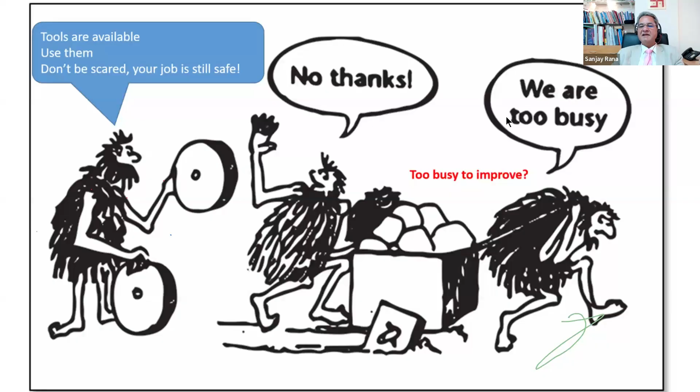All right, so what we are going to talk about is a new era in dam health assessment. We always say it's a disruptive technology which we are going to talk about, because we are getting into a journey into the disruptive realm of geophysics.

This is a technology which is poised to revolutionize our approach to dam health assessment. When we talk about disruptive, we are basically talking about technologies that not only innovate but redefine entire industries, like when computers came, when mobile phones came, and today when AI is coming up. All these are great examples of disruptive technologies which completely redefine entire industries and how work is done.

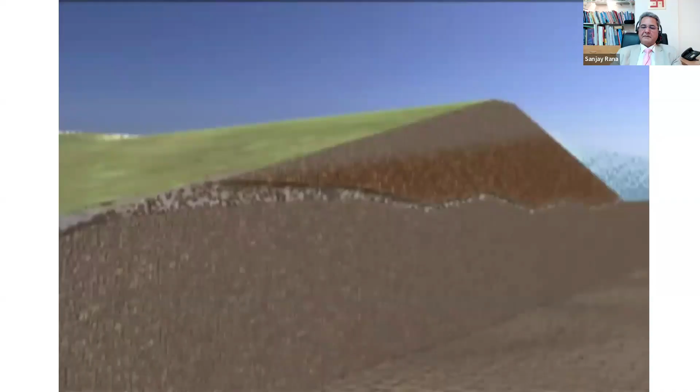While the dam experiencing seepage may appear in sound condition, there may be damage occurring to the internal structure of the dam. If seepage flow rates appear to be increasing and the flow is not clear and is carrying material, internal erosion or piping is likely occurring. Piping is an erosion process that occurs inside the dam whenever the seepage flow starts eroding embankment materials out of and away from the dam. This starts at the downstream slope or toe and moves rapidly upstream to the impoundment. This process will tend to accelerate as the expanding larger opening or pipe allows for increased seepage flows.

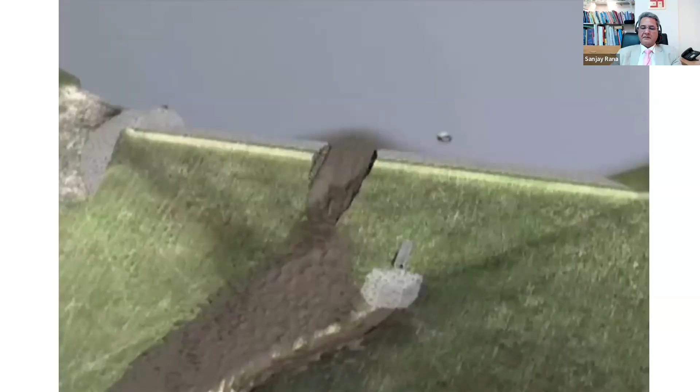If left unattended, the seepage flow and progressive internal erosion will soon get out of control. When the internal pipe or void becomes large enough, the embankment structure above it will collapse. This will result in failure of the dam's embankment and a potentially catastrophic release of the stored water, which may cause serious property damage and loss of life.

If left unattended, if not detected, if we are ignoring it, if we are not able to see it or detect it - these are the key concepts. And then, of course, at times simple things are overlooked.

As I just gave the example, simple things like vegetation on the dam. Vegetation is absolutely bad for the health of the dam because animal burrows can happen because of that. Small seepage paths can be created because of that. When trees are uprooted, it can leave cavities. So dams have to be maintained.

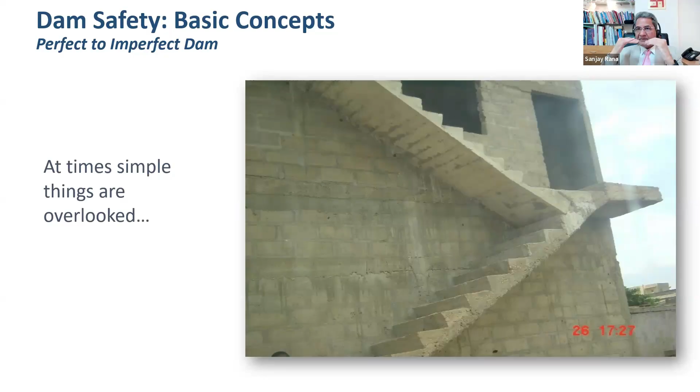So simple things are overlooked many times, and the problem grows with time. As I said, it doesn't happen overnight. And today, it's almost impossible to make new dams because of environmental concerns, space constraints, and so many reasons. We have to take care of the dams which we already have. Most of the dams are getting old. In India we have a large share of dams which are more than 50 years old, even 100 years old, and that is where we have to be even more careful about maintaining them.

We'll just look very briefly at dam inspection and assessment current practices, how we are doing it currently. First is visual inspection - regular on-site inspection by engineers to visually assess the condition of the dam. So someone will go maybe pre-monsoon, post-monsoon, look at the dam, and based on that, try to look at signals like cracks, spalling concrete, seepage, vegetation growth on the dam face, and make some conclusions out of it.

It's very much like touching the wrist of a patient just to feel what the temperature is like. Feel, not even measure - feel. Oh, you look hot today. Oh, it's cold, not a problem. And based on this temperature, trying to understand what's happening inside the patient's body. So that is visual inspection.

Then there's dive inspection, underwater inspection carried out by professional divers, particularly for the submerged part of the dam. So sometimes you can send a diver or even an ROV in the upstream area, and they can look if some water is being sucked from a particular point. So these are dive inspections.

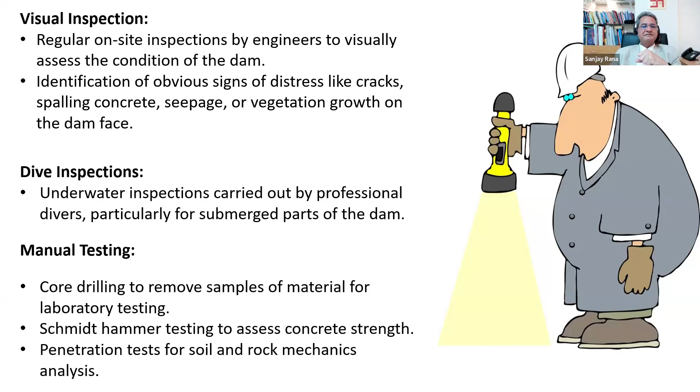Manual testing - core drilling, Schmidt hammer, penetration tests, etc. Engineering analysis - review of original design and construction documents, and based on that we do structural analysis about material properties, taking all assumptions about material properties because there is no direct measurement of them. We can have instrumentation like piezometers, inclinometers, strain gauges to monitor the structure over time, and use this data to assess water levels, leakage rates, and deformation measurements. Unfortunately, instrumentation in most old dams gets defunct, so most dams do not have active instrumentation.

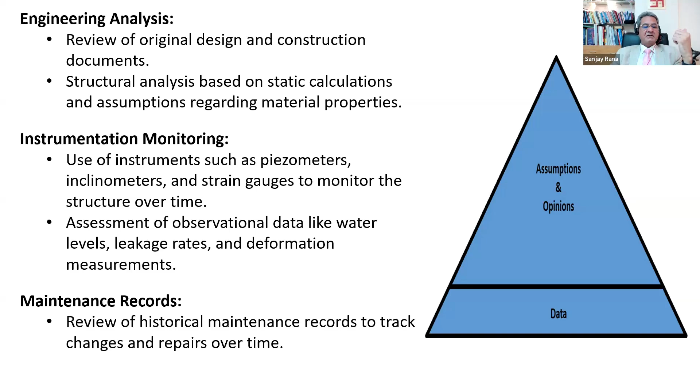Then we sometimes look at maintenance records to review historical maintenance and track changes and repairs over time. There's also load testing, empirical methods, limited NDT like ultrasonic, GPR, radiography, risk assessment, etc. So this is what we are doing presently.

So all these approaches, if you look at it, are surface only. We are not actually going and looking inside - we are looking only on the surface. They are extremely inspector dependent - that is, the qualification, the expertise, and the motivation level of the person doing it. There are many cases where people have not even visited the dam for years altogether. They were not motivated enough to visit the dam, or they did not have enough expertise to understand the meaning of a small subsidence in a particular area. It's extremely inspector dependent, and for such procedures it's almost impossible to have standards.

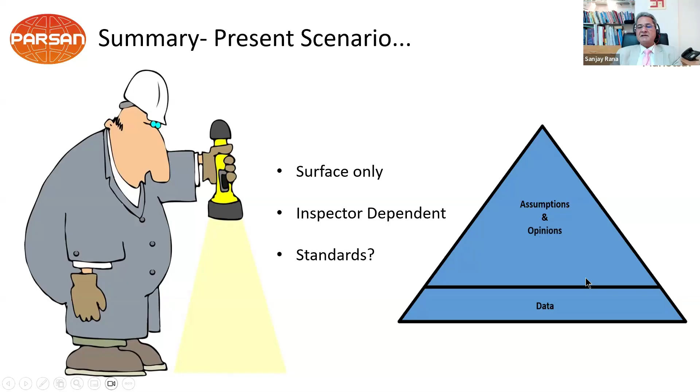So there's very little data, and lots of assumptions and opinions. This is how we are dealing with it today. And then there can be a lot of difference between perception and reality - what we see can be very different from what is happening inside the dam body.

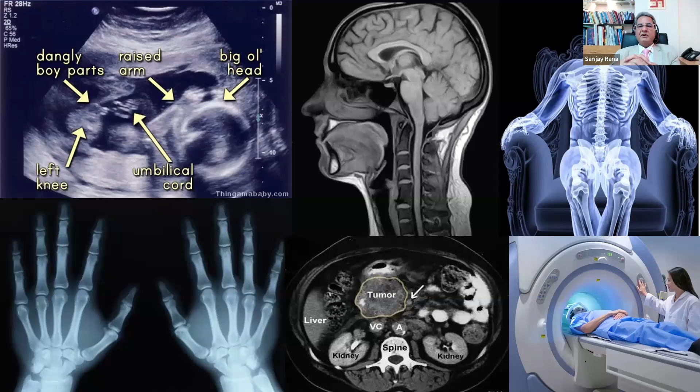So it's very easy, the best way to understand what we are doing in geophysics is to compare it with medical science. In medical imaging, we are sending different kinds of rays and waves inside the body, and looking at that, we are trying to create an image of what's inside the human body. Similarly, in geophysics, we are sending different kinds of rays and waves, or measuring naturally occurring fields like gravitational field, magnetic field, etc., to create an image of what's inside the ground.

So it is used right from oil and gas exploration to mineral exploration, groundwater, engineering applications, environmental applications, forensic applications, archaeological applications, etc. So there are a number of areas of application of geophysics.

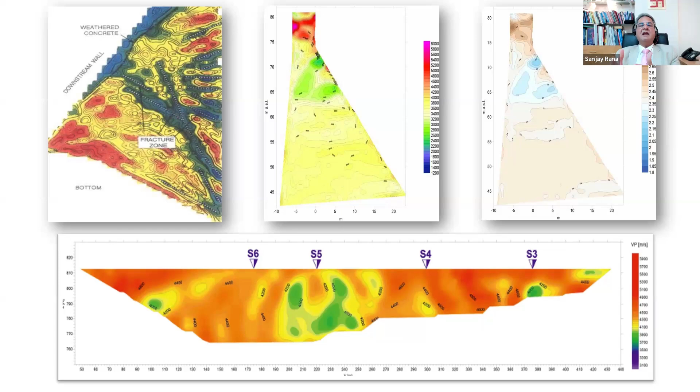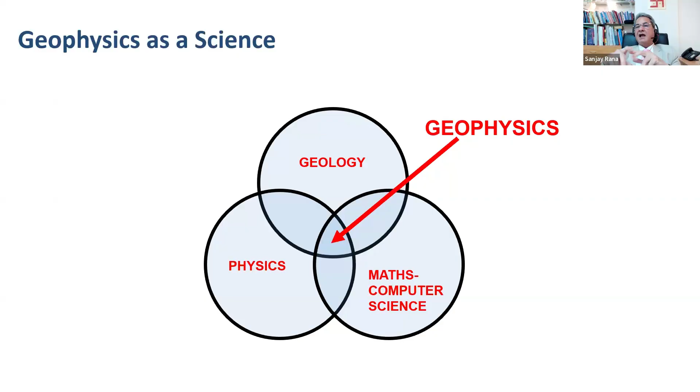So in geophysics, we are doing almost the same thing which is happening with the human body in medical science. That is, we are sending different kinds of rays and waves inside the earth or inside the structure to create an internal image of the earth or the structure. Simple to understand. As a science, it is at the intersection of geology, physics, maths, and computer science. So all three are being used when we talk of geophysics. A good geophysicist has to have a good understanding of geology, physics, maths, and computer science.

For any project, it's not dam specific. For any project, why use geophysics? And the answer is simple: you have to use geophysics because of the low cost. Again, the difference between your X-ray, ultrasound, and surgery. So in geophysics, the cost is very low compared to traditional methods.

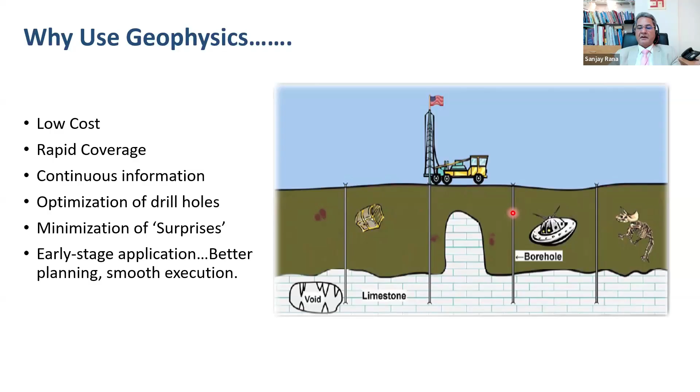And if you want to understand geophysics better, here is the third Indian Near Surface Geophysics Conference coming up, 12th to 14th November. It's happening in Delhi. My colleague Anushka will put the website link on your chat box. You can visit the website. We are going to talk about all the applications of near surface geophysics from every field.

All right, so for dam health checks, why it is so important is that these methods can probe below the surface. Till now, as we said, most of the methods we look at are surface only. Here we can go below the surface to detect defects, voids, anomalies deep within the dam and its foundation.

So this is in contrast with visual inspection, which only gives you surface condition. Here you can detect issues which can be critical to the structural integrity unless they are detected early. For example, a small seepage zone which is developing, if you detect it early and attend to it, it will not grow bigger and become a problem later.

It provides continuous data, which is very important because it gives you a comprehensive view of the dam health. It's non-invasive, because a dam is the last structure you would like to drill through. So potential weaknesses, seepage pathways, and other risks can be identified and addressed before they become critical.

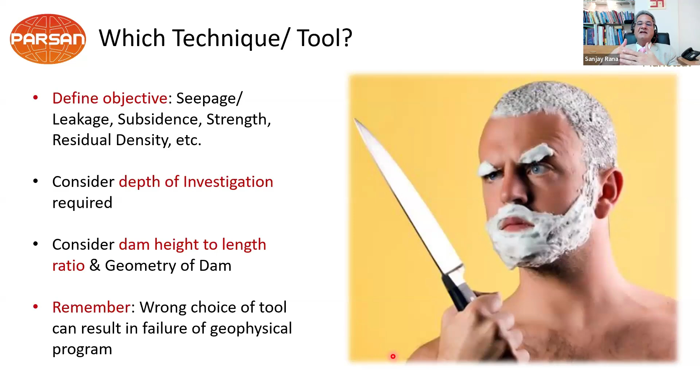Each dam is different, and since all the parameters of a dam are different, you have to look at these parameters before you decide the methods which are applicable. So it's a very important thing to remember.

Concrete dams can have cracks, degradation, water leaks. Masonry dams can get degradation, density loss, water leaks. Earth dams can have leak path detection issues, internal erosion, strength, subsidence, cavities. Then you can have issues with your stilling basin—condition, erosion, damage. You can have issues with canal leakage, foundation defects.

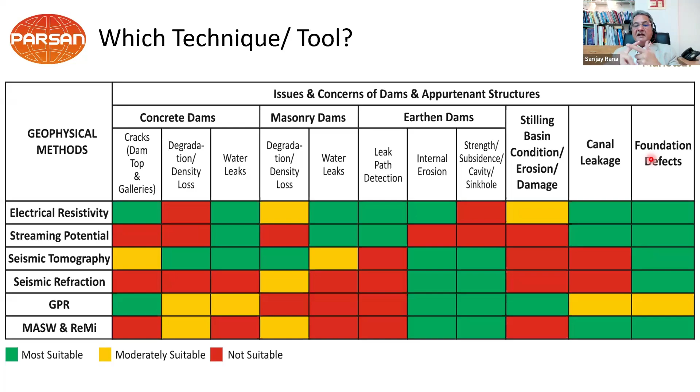So we have made this table which shows that there is one or more methods which are most suitable or moderately suitable for practically any problem you can list in your dams or appurtenant structures. The idea of showing this table is that for any problem or objective you have, there is one or more methods available.

How you apply geophysics is very important. That is something which pains me to see today, that more often than not, we are making a big mistake.

There is a 7-step framework of geophysics, which starts right from setup, where we understand the objectives, then properties, where we look at the material and what property contrast we are expecting. For example, with water seepage or water saturation, which physical property is going to change? Mostly the resistivity or conductivity. So which property is going to change? Based on that, we find out a suitable geophysical survey and design an effective and efficient field survey. It's very important to follow this process.

Unfortunately, today most practitioners are completely ignoring these 3 steps, and they run directly to data, that is carry out the field survey. So they take equipment, just go to field and collect data. That's not the right way of doing it.

Anyway, so data, then processing, then interpretation, and then synthesis, combining all interpretation with prior knowledge of the problem and other relevant information. More often than not, this is what is happening in the name of geophysical services, and steps 1, 2, 3, and 7 are being ignored, and that is a big problem. So we have to be very mindful of how we are applying geophysics.

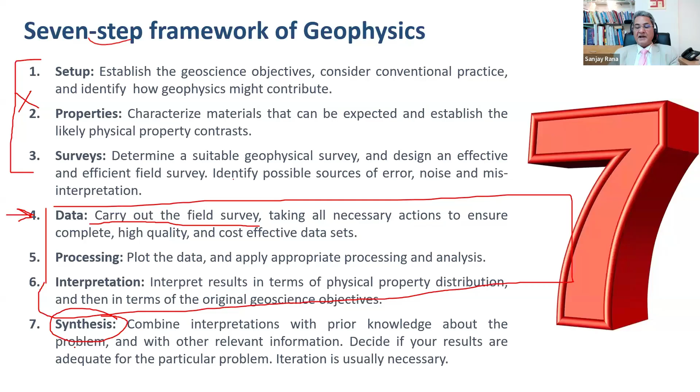Now coming to the methods we are going to talk about. As I promised, we are not going in great theoretical detail of all the methods. That's not the idea of this webinar. The idea is just to make you aware of what all is available and how it can help you.

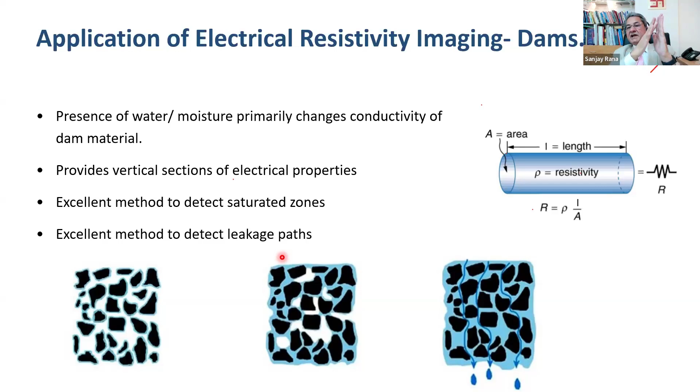Electrical resistivity imaging is a very strong method which is basically working to find out the change of conductivity or reciprocal resistivity. Presence of water or moisture will change conductivity or resistivity of the dam material. So in a dam, when you go vertically down, there will be changes in moisture level because of the change in reservoir level. That's normal. But once you go laterally from one end to the other, there should not be any change unless there is an anomaly. That is the basic principle on which the resistivity method works.

The working principle is very simple. You have 2 electrodes to inject current, 2 electrodes to measure potential. Ohm's law comes into picture: R is equal to V upon I, and based on that you calculate the resistance multiplied by a geometric factor to get resistivity.

What has changed over the years from the basic 4-electrode resistivity method is now you have multi-electrode resistivity methods in which you can put as many as 120 electrodes at the same time. The basic principle doesn't change, you still have 2 current electrodes and 2 potential electrodes, but the way you conduct your fieldwork has changed a lot. It's much faster and you're able to get a good 2D or 3D image of your subsurface.

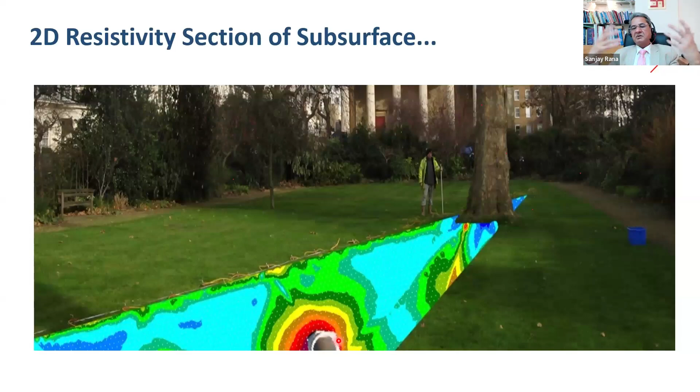So something like this: you have all these electrodes put in the ground, you take the data, and wherever the resistivity is low, like tree roots, that's low resistivity, a rock is high resistivity. That's why you get a 2D resistivity distribution.

So on a dam, how do we do it? Let's say it's a dam, so we take a few lines on the dam top, and then we can take a few lines on the berm. There is a particular dam where we took as much as 5 parallel profiles, 3 berms and two on the top. You can do as many parallel profiles as you can.

The reason is, if there is a seepage zone going like this, it will be detected on this part, this part, this part, this part, and going down, if there is one more line here, it will be detected here too. Like this, you'll be able to see a beautiful continuity of your seepage zone right from upstream to downstream. That's why you do as many parallel lines as you can.

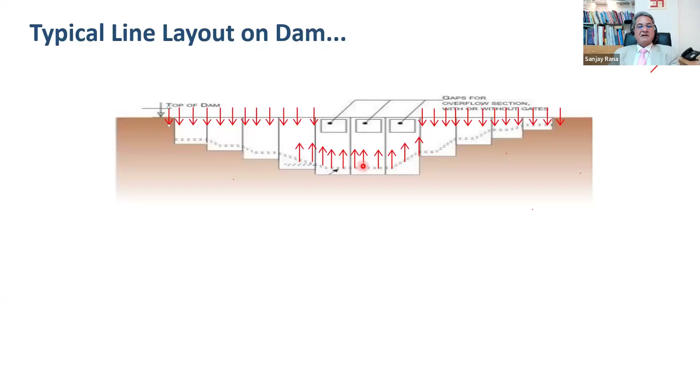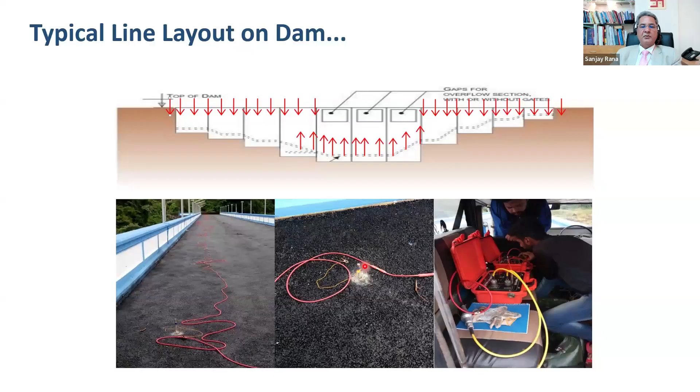So this is the top of the dam, and we put lines on top. If you're in the gallery portion where you can't do anything on top because of the overflow section with gates, you can put it even in the gallery on the roof, because thankfully current doesn't understand gravity, it is not affected by gravity. These are typically a few field pictures. The surface can be asphalt, it can be anything, that's not a problem. We just make small 6-inch holes to put the electrodes there, and then we set up the equipment.

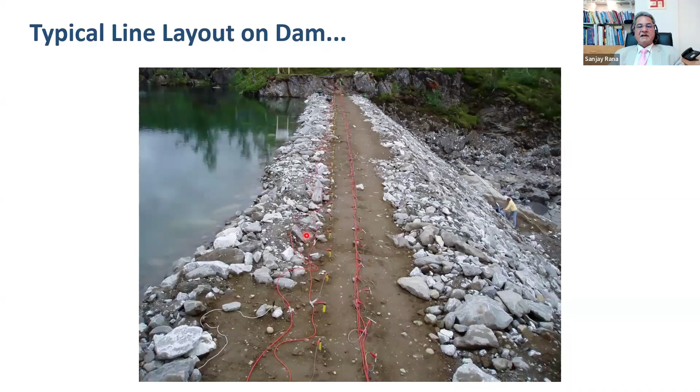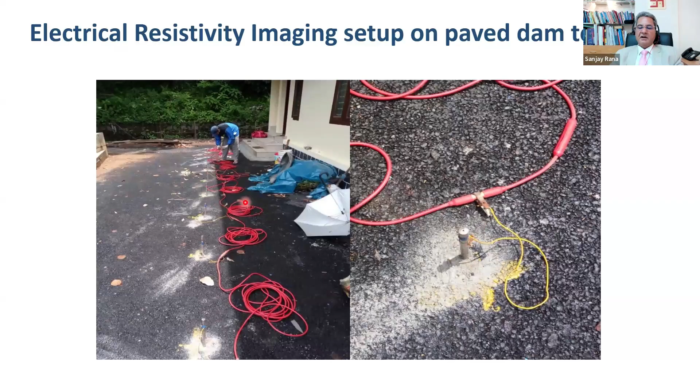Here is the equipment setup. So here are the electrodes, here is a person taking the reading, and here is the same thing, electrodes connected by multi-core cable in a dam with asphalt top. Once you continue, you complete your data acquisition, which doesn't take much time.

These days, a typical array, once you have done the layout, is taking 20 to 25 minutes. A layout can take 1 to 2 hours, depending on what the top surface is, etc. But once you do it and take the data and process it, this is the kind of section you get.

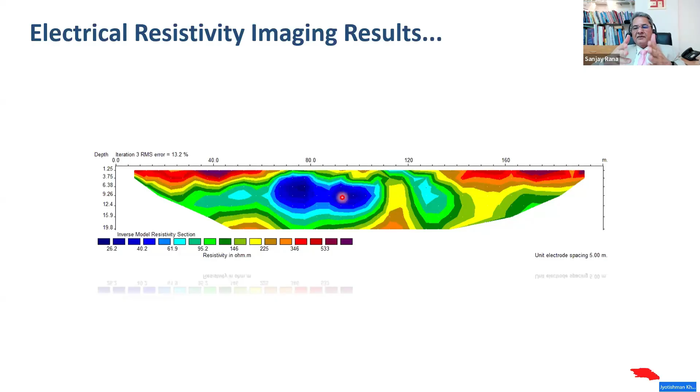Now a parallel line done after some distance, and these two zones are practically merging together. So you're having the complete mapping of the zone from one end to the other.

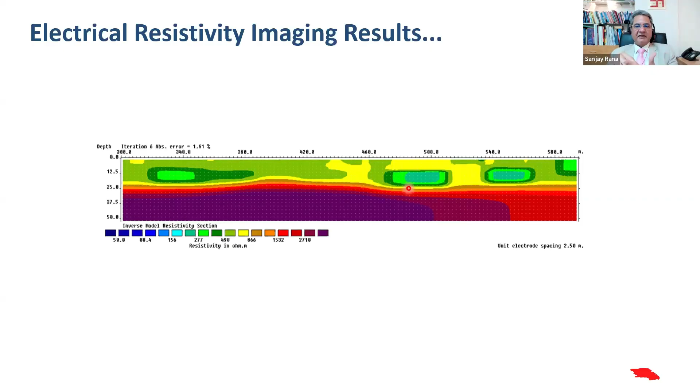Again, another example, this is the bedrock, this is the dam contact here, and these are the three zones of low resistivity in this dam. So this is electrical resistivity imaging, working on the principle that higher moisture level or higher water level in the dam body will lower the resistivity value. Simple principle, effective for embankment dams and dams.

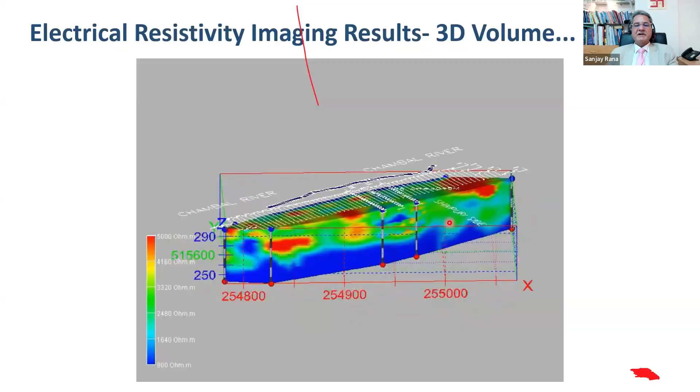Right? So if you have good data, good density data, you can convert the entire data. So this is the cavity from one end to the other, which is coming here. So if you have good density of data, you can create 3D models of your data to practically see how the entire thing is looking in 3D.

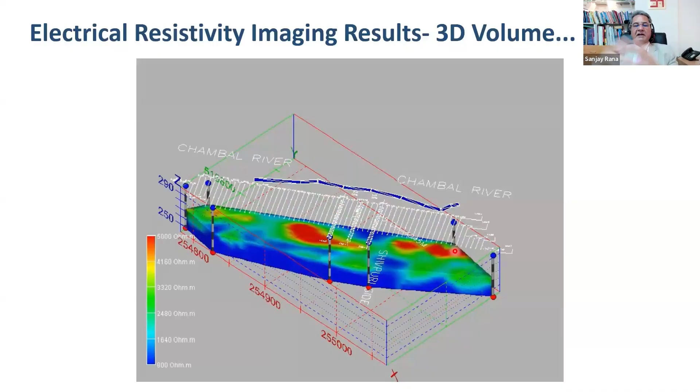Second method, which I'm going to touch upon, is streaming potential. So you have done electrical resistivity imaging, great, you know where are the zones with higher moisture level or higher water concentration. Wonderful. Now you want to understand whether there is a water flow happening across this zone or not. And for that, you club another method of streaming potential.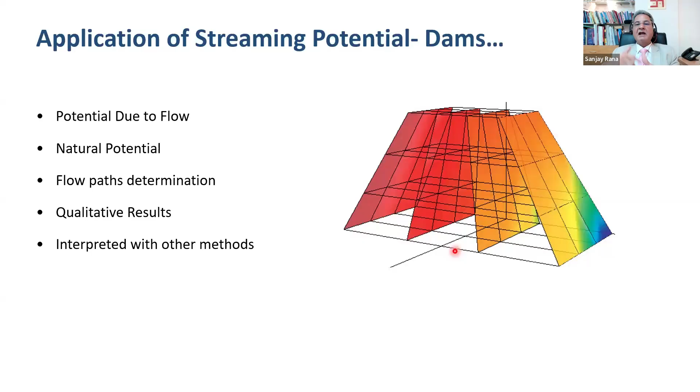So streaming potential is the potential which happens due to flow. So it's a natural potential. It is used for flow path determination. Results are qualitative, and hence it is interpreted with other methods. You will understand why we said the last three things.

So what's happening is that when the water is flowing through a porous medium, the positive ions which are attached to the clay membrane are being displaced. When positive ions are displaced, just like a battery, a current will start flowing. A negative potential will develop. So this is the basic simple principle of streaming potential.

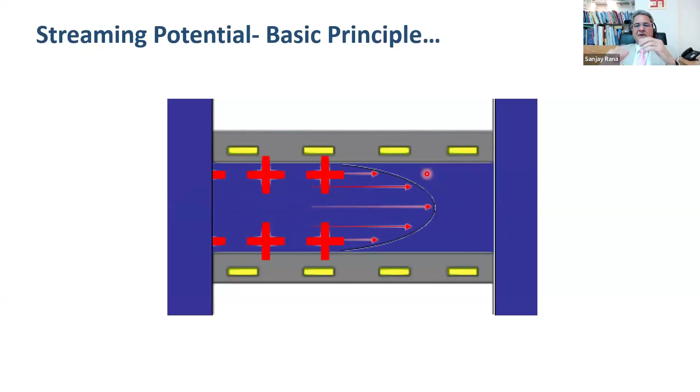So in case of a dam, let's look at it like this. So this is the reservoir, and here let's say water is flowing like this. Now, more often than not, if we detect a seepage in downstream here, we think that it is coming from here.

That's a common sense approach, which 90% of the times is not correct. Water can take a path like this, so all the treatment which you do here will be ineffective.

If water is taking a path like this and you do one line here on the reservoir, one line on the crest, one line on the face, where the ions are moving out, you will have a negative potential. Another line is still a negative potential. At the time of exit, wherever it is exiting, it can be near the face, it can be 500 meters downstream, there you will have a positive potential. So ultimately, if you do a number of lines on the dam, you will be able to connect all these anomalous zones and make a flow path, and that becomes our seepage path.

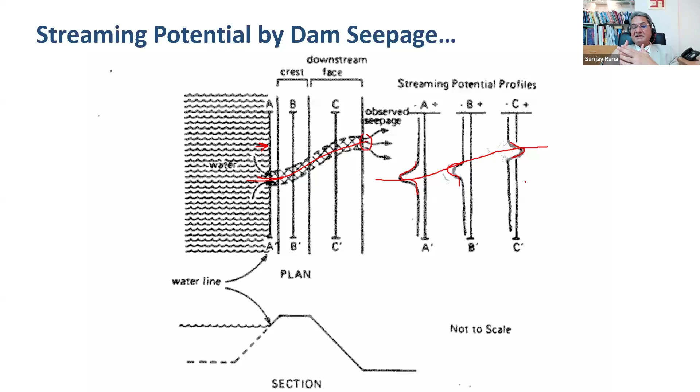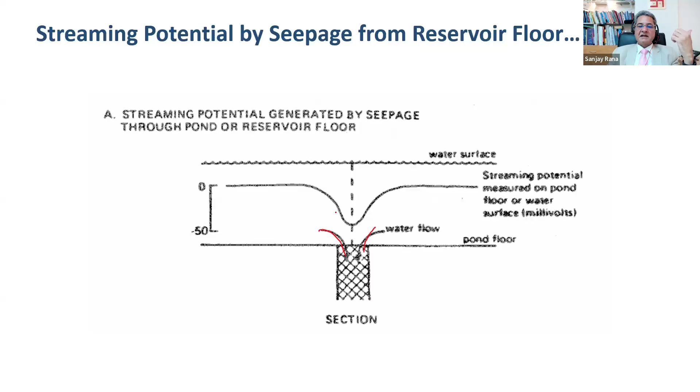Very, very effective method when interpreted with other methods. I'll tell you how it is done. It also can be used to detect seepage from the reservoir floor. So on the reservoir floor, water is going down like this, and if you do it from the floor, you will be able to see it.

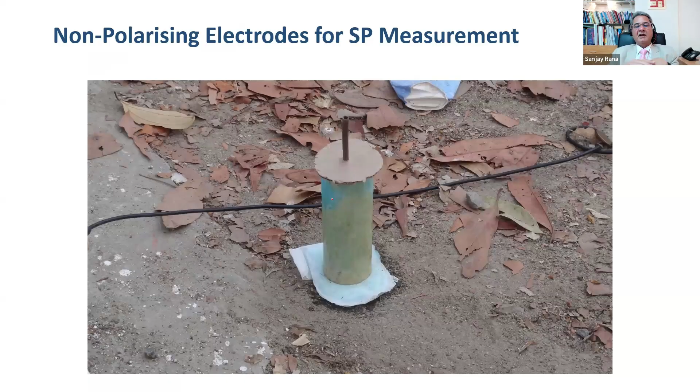This is part of innovation. We found a way of doing it even on the asphalt surface, on the concrete surface, and how it is interpreted. So this was a dam around 2.7 kilometers long. I did this in 2000, I think 2000 or 2001, long time back.

ERI was done, and this zone was low resistivity. This zone was low resistivity. This zone was low resistivity. This zone was low resistivity. Even this was slightly low resistivity.

But when streaming potential was done, the complete SP development was across this zone. Other zones did not have any associated SP development, which made it clear that at present, whatever seepage is happening is from this zone. The other zones are obviously having a high level of moisture or water, but right now they are not contributing to the seepage. But if left unattended, after a few years, even these zones will start contributing to active seepage.

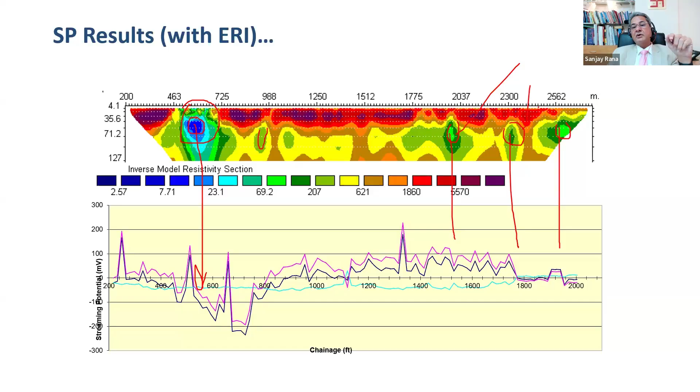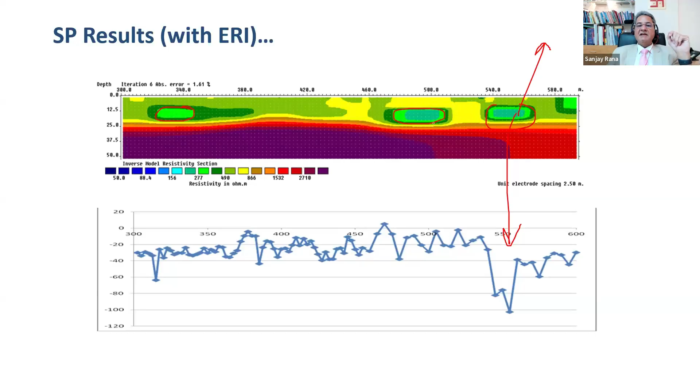That's how you plan your rehabilitation. Similarly here, three zones of low resistivity, 1, 2, 3, but only one zone is associated with an SP anomaly. So this is a zone which is having active seepage, and these two zones right now are dormant when it comes to seepage.

Next method I'll go to is seismic tomography, which again is a very, very strong method. So we talked of electrical resistivity imaging, it is done from the surface. Streaming potential is done from the surface. Seismic tomography is a very high resolution method. It can be between dam top and gallery, or upstream and downstream face.

Why it is such a strong method is because it is linked to the strength and density of the dam. Whereas in terms of ERI, we were looking at conductivity, we were looking at resistivity, we were not able to comment on the strength. When it comes to masonry dams or concrete dams, we are looking at strength, we are looking at internal fracture zones. For example, in case of concrete, we are looking at internal zones of deterioration where a lot of leaching has taken place and material has moved away; in case of masonry dams, density has lowered down over a period of time. So we need a method which is directly linked to strength and density.

And what can be a better method which directly measures compressional wave velocity, P wave velocity. So this is where seismic tomography comes into the picture. It has much better resolution also, because here we are directly working between two mediums. So it is possible to pinpoint defect zones within the dam, enables grout quantity estimation, very important, and determines treatment success by pre and post treatment study. So if there's a dam and you do a pre-treatment and post-treatment study, you can actually calculate what has been the improvement in density based on whatever grouting has been done.

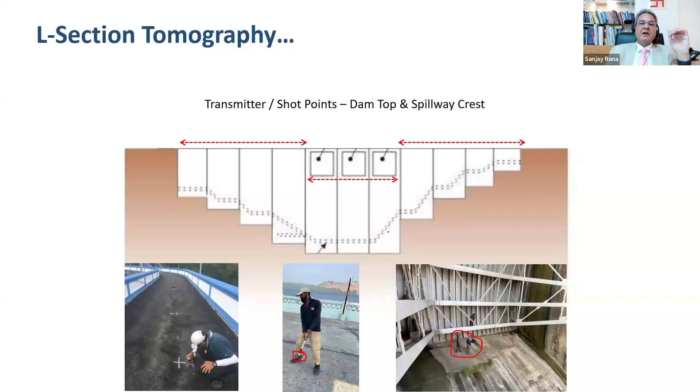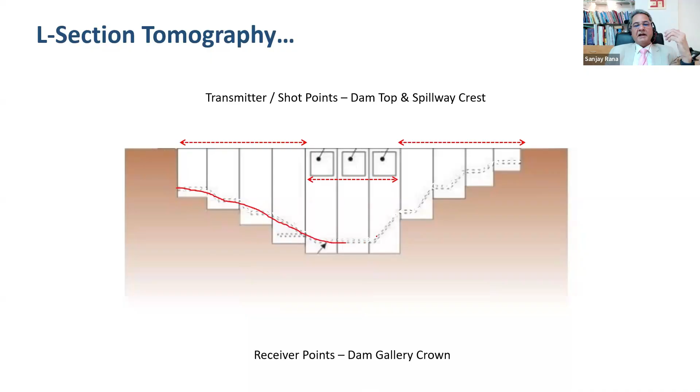They have gone here with all the safety harness and all that, and they'll be hitting on the spillway so that waves can be transmitted down. This is where we do our shot points, and we put receivers in the crown of the gallery. So this is the gallery, and we are putting our receivers on the crown of the gallery here.

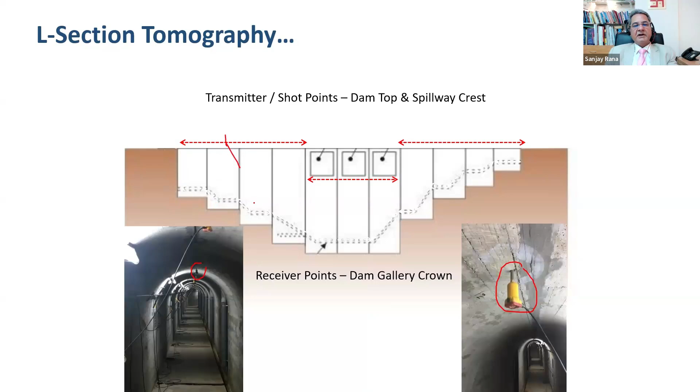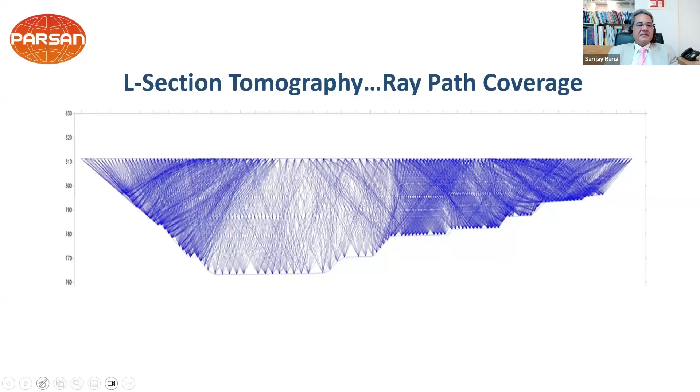So here are the receivers which are put in the crown of the gallery. So now what we are going to do is we are going to hit here and we are going to receive here like this. That is what we are doing in tomography. So once we do this, we have this extensive ray path coverage. More the ray path coverage, better are going to be your results. And once we process this data...

Now, this entire thing will take around a day or two to conduct in field, for 470 meters of dam. And as soon as you finish this, you know which areas are having problem in my entire dam body. If you do not do this scan, what is recommended is to do 3 rows of grouting, 3 meters by 3 meters, etc. There's such a waste of resources in terms of manpower, money, and material. Once you have done this, you know exactly where the problem is.

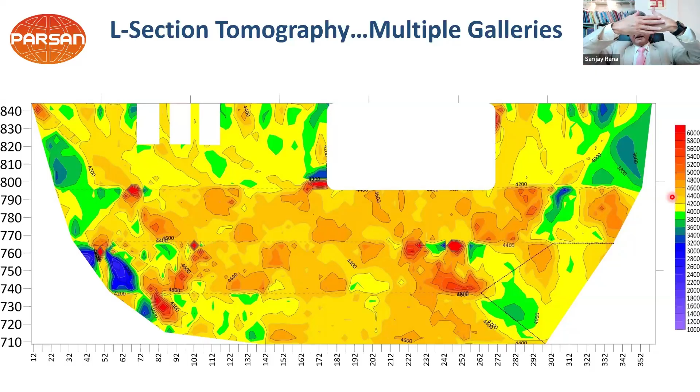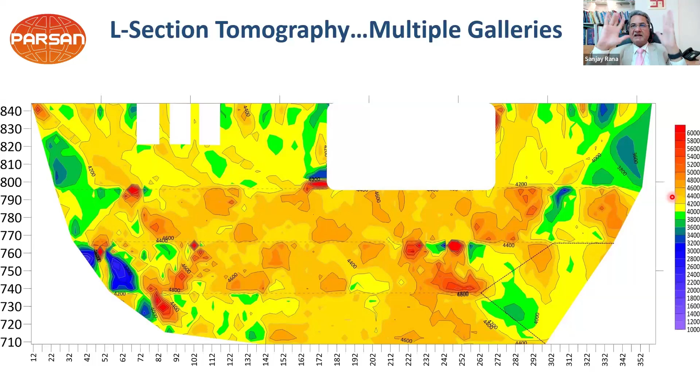Now, the next intelligent question will be, we have done L section, so we know the dam all along the length, but how do we know what's happening from upstream to downstream face? Where this zone is in terms of upstream to downstream. So can we have a three-dimensional kind of a thing? Well, the answer is yes.

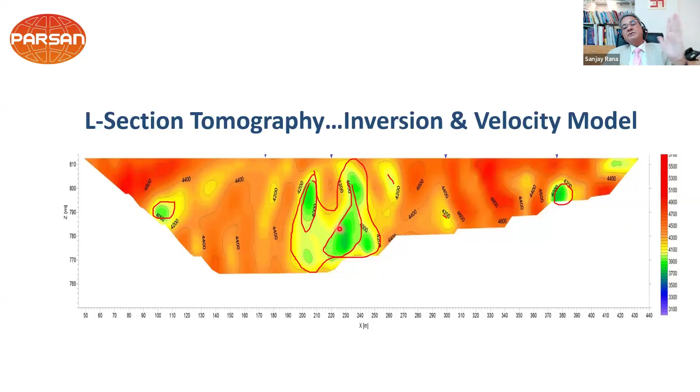So once we have done L section, we choose where the cross section should be done. For example, we decided to do a cross section here because here is a low velocity zone and I would like to investigate this further, how it is going from upstream to downstream. So I'll do a cross section here.

So going with the same principle, we will have transmitters and receivers on upstream, and we will have transmitters or receivers on downstream. Reservoir water can be full, you don't need to empty the dam at all. You can have water up to here, no problem. More the water, better it is for us actually when we investigate this - that is a different topic - but your water can be full, no problem.

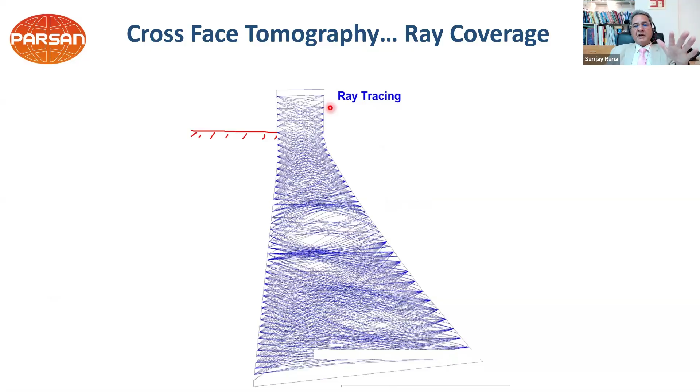And then you again create the same dense ray paths, process the data. And now the zone which you are seeing in L section is visible here in the cross section. So for example, in L section, you had a bad zone coming here, and now you wanted to see how it is going from upstream to downstream. So this is how it is going from upstream to downstream. So you practically have a three-dimensional information on your dam. That is the strength of seismic tomography.

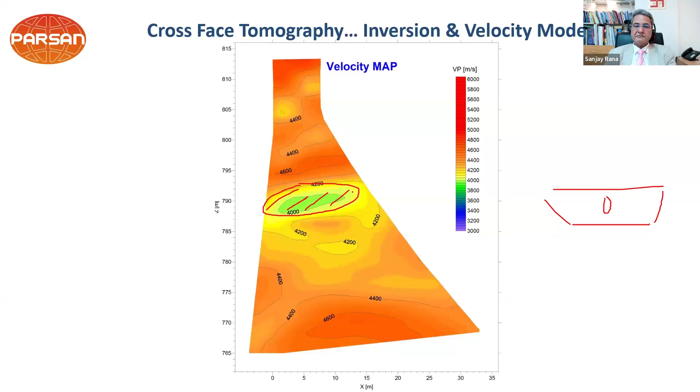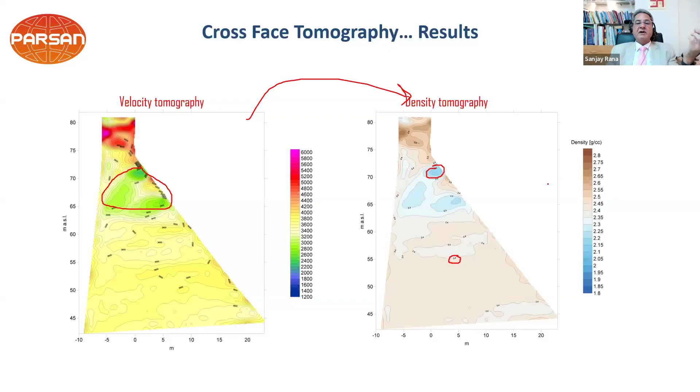Once you have done that, this is your velocity tomogram, which you can convert to a density tomogram. This was your bad zone. Velocity is not generally understood well by non-geophysicists, so you convert it to density. Now you know this is 2.8 to 1.8. Most of the dam material has a density of 2.4 to 2.6, and where it has gone low, it's 2.2. So there has been a density loss of around 0.2 to 0.3 gram per cc. This is something based on which you can do grout quantity calculation.

Another method applicable in many cases is GPR, ground penetrating radar. Again, a very strong method for various applications. You can use it in a dam to understand characterization of internal structure and soft zones. You can use it in a reservoir to see different layers of sediments and detection of cavities. It works on the principle of electromagnetics.

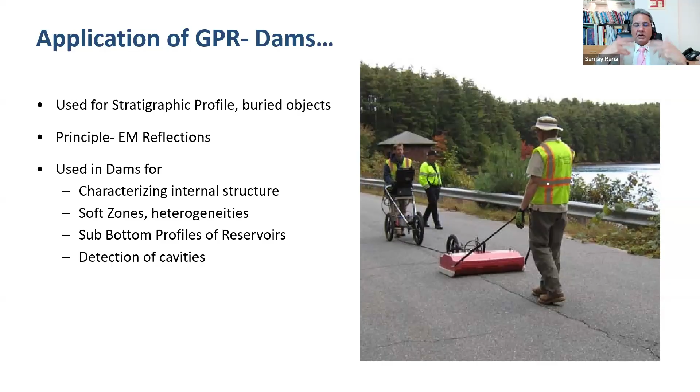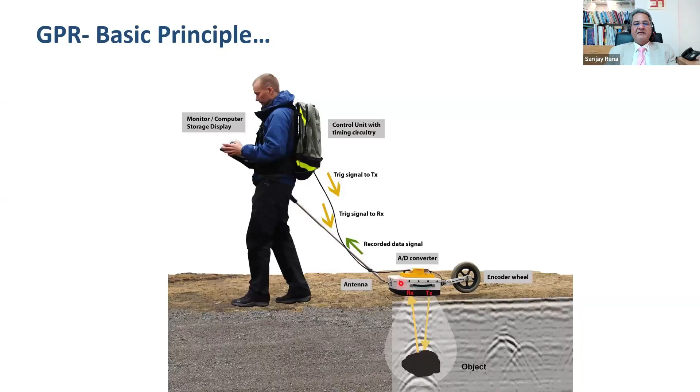At this time, digital devices were not available, at least in India. So this is from 1998 when I used analog GPR to do this work. These days, pictures are much better, but even then we were able to see these stratigraphic interfaces. These were the top of the crest, and this was a zone of anomaly here, a zone of anomaly inside the dam body.

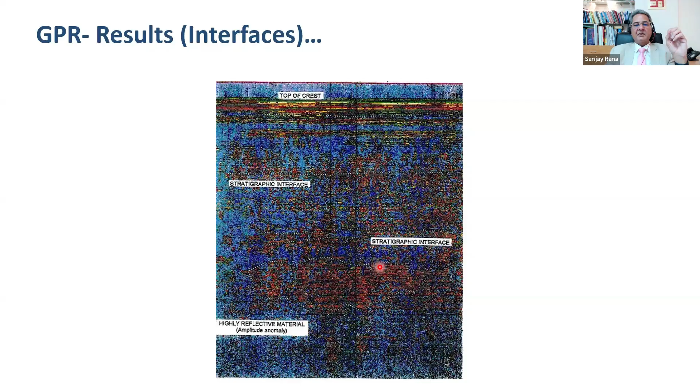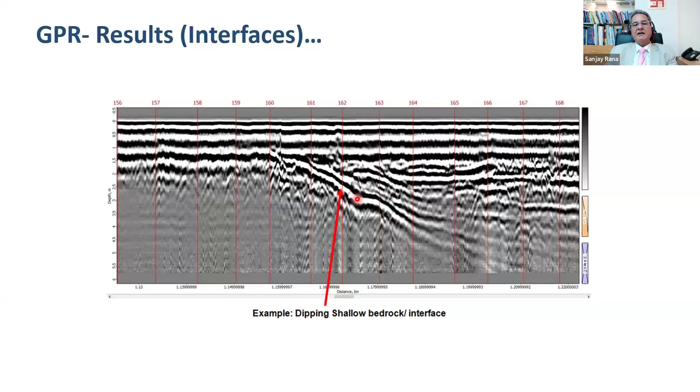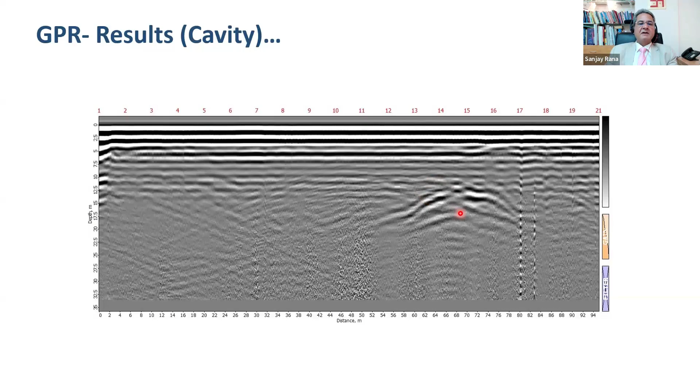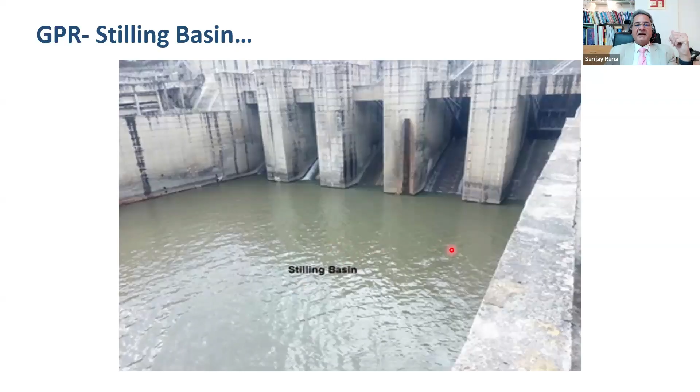One of the best examples of GPR is for a stilling basin. You want to investigate the concrete floor of the basin, but for that you generally have to empty it, or an echo sounder will just give you the top part of it. But you want to see under the slab also. That's where GPR comes in very handy. So this is a work which was done. Here is the antenna of GPR. This is the raft which was made locally, and this is the investigation of the stilling basin.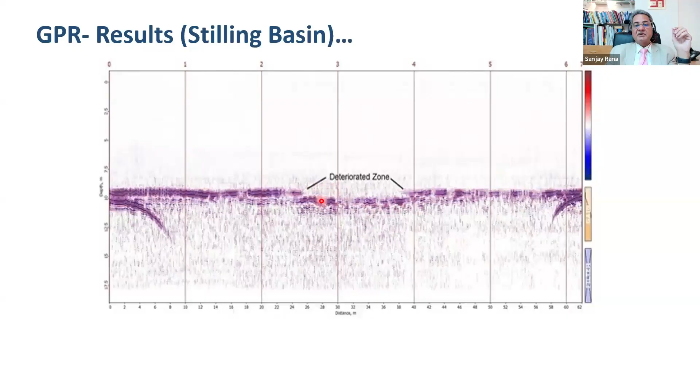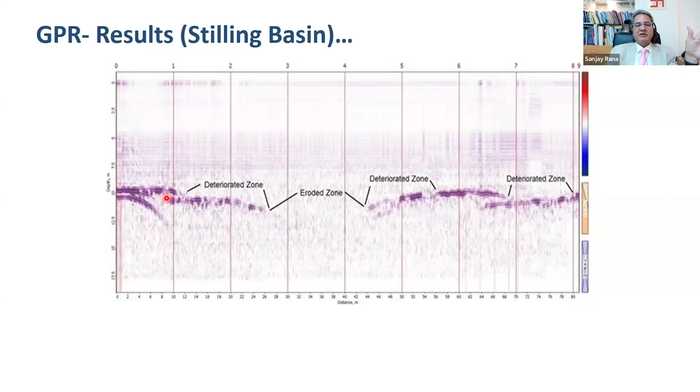So deterioration has taken place, and in this area the floor has completely gone. It has eroded so much that you're not able to see it altogether, so this is a deteriorated zone and a completely eroded zone. Then the complete results were compiled into one map, and when it was opened up after 2 years, it matched beautifully with the observations here.

Then we have seismic refraction, which again is a very strong method for phreatic line determination. It gives you P wave velocity, so it indicates the strength of subsurface material. It can be done from the dam top, and it can be used for bedrock mapping because sometimes we want to see defects in our foundation. So it can be used for that, and for phreatic line determination.

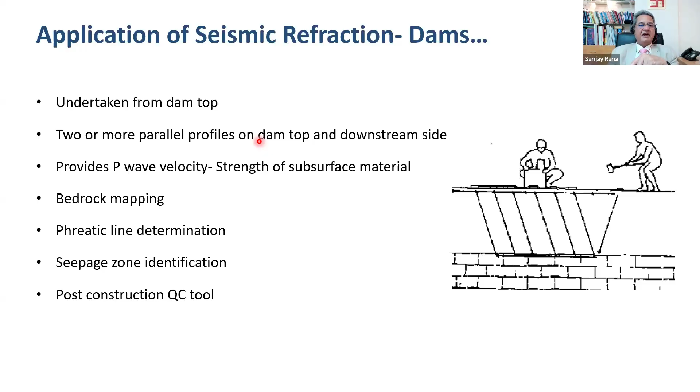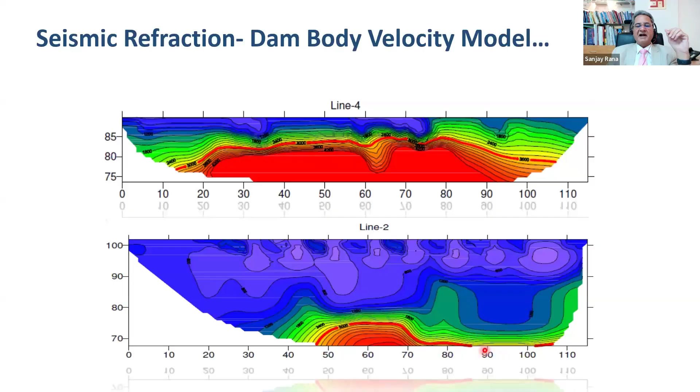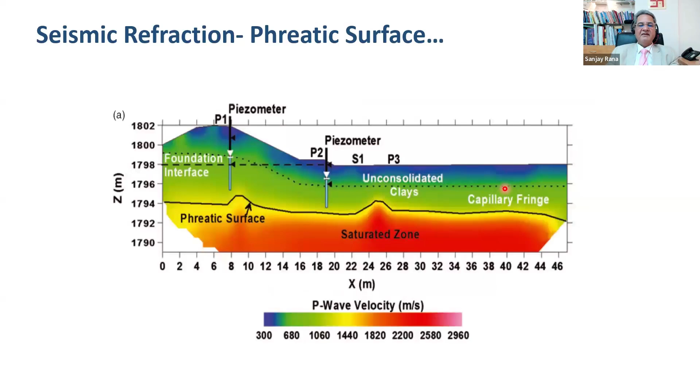Look at this example. This was an earthen dam, built on bedrock. Here, the defect in the bedrock was picked up using seismic refraction. Similarly, the dipping of the bedrock was picked up using seismic refraction. This is the dam body on top, and here we are looking underneath it. This is the phreatic surface, which was also picked up using seismic refraction. So again, a very strong method when we talk about P wave velocity based determinations.

REMI and MASW are used for shear wave velocity. So seismic refraction is used for P wave velocity, but sometimes there is a zone of subsidence, and we want to find out the stiffness of the material, especially in earthen dams. If there is subsidence, it means something is happening inside the dam, and that is picked up beautifully by MASW. It gives you the S wave velocity of the subsurface, which tells you stiffness, again done from the dam top. It's also used for earthquake site response for new sites and for liquefaction analysis.

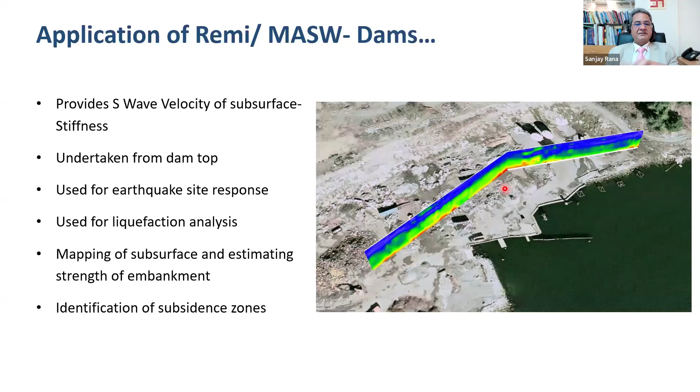And it works on the principle of Rayleigh wave dispersion. Again, no theory, but let's see how it looks. So these are dams.

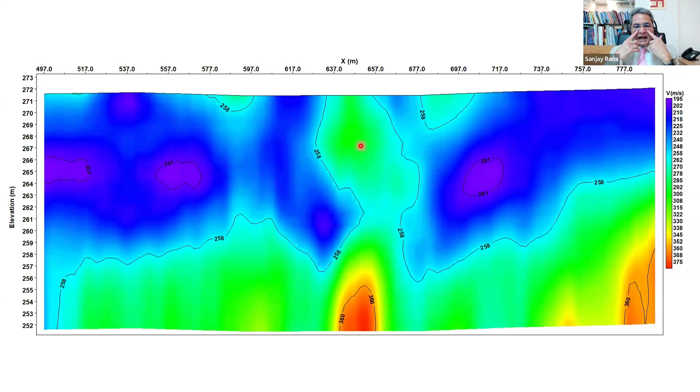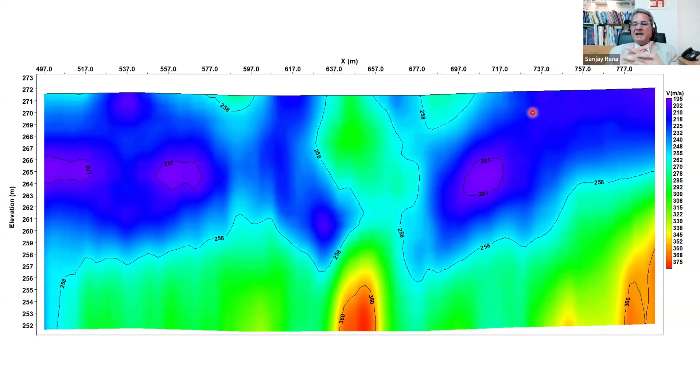This is another earthen dam example where subsidence was seen on the top. Here it's 272 meters to 252, just about 20 meters deep because the dam height isn't much, and you can see the critically low velocity and general low velocity zones from the MASW. So again, a very rapid and effective method to find out the stiffness of the dam material.

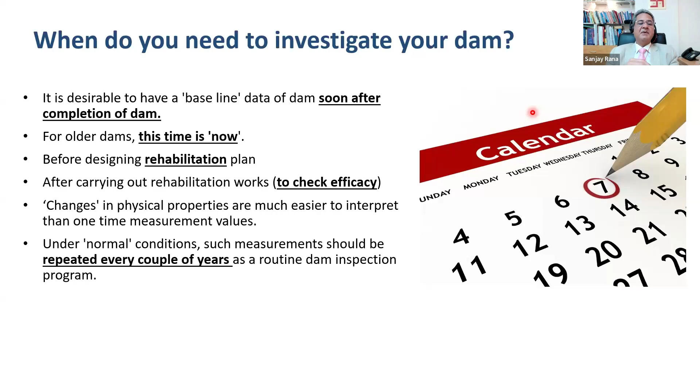I'm coming almost to the end of this session. So when do we need to investigate our dam? It's desirable to have baseline data of the dam soon after its completion. Like they say, once you turn 40, you must visit a doctor to get a baseline ECG done. Similarly, for every dam, baseline data should be collected soon after completion. The problem is that when older dams were built, these technologies weren't even available, so for older dams, this time is now. Before designing a rehabilitation plan, it's absolutely critical to do this, so you can plan your surgery properly. Do not conduct surgery without doing an ultrasound, X-ray, or CT scan, right? Then after rehabilitation, to check its efficacy, whether it has grouted the weak parts, whether those parts have been restored, changes in physical properties are much easier to interpret. So it's always good to do this at regular intervals. Under normal conditions, such measurements should be repeated almost every couple of years as a routine dam inspection program.

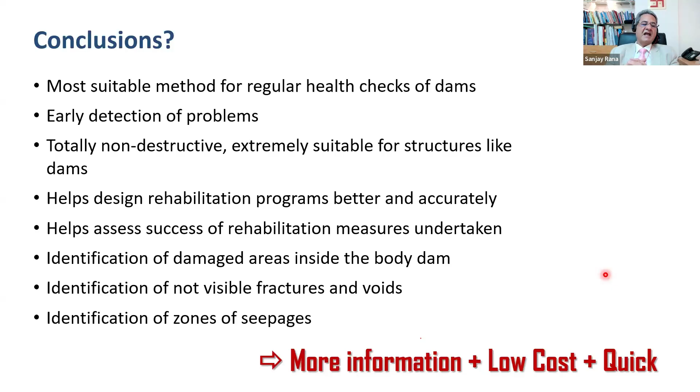With this I'll conclude this webinar. All these methods are most suitable for regular health check of dams, early detection of problems. They're totally non-destructive, so extremely suitable for a structure like dams. They help design rehabilitation programs better, identify damaged areas of the dam body, not visible fractures and voids, and zones of seepage, giving more information at low cost and very quickly.